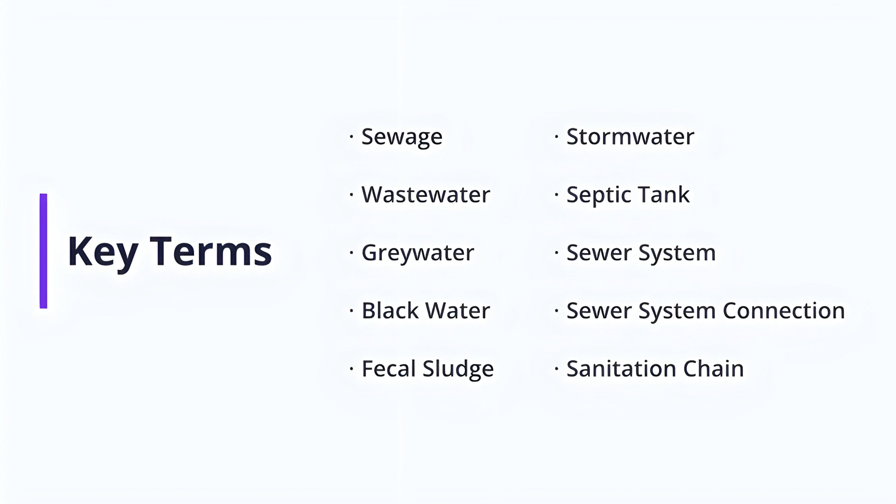This chapter provides an overview of the process and the multidimensional framework that will apply for the remainder of the course. Please note that some of the dimensions and considerations may not be applicable to your context. We will do a high-level overview of key terms relevant for our course. Let's get started. The term sewage is used interchangeably with domestic sewage, domestic wastewater, municipal wastewater, etc.

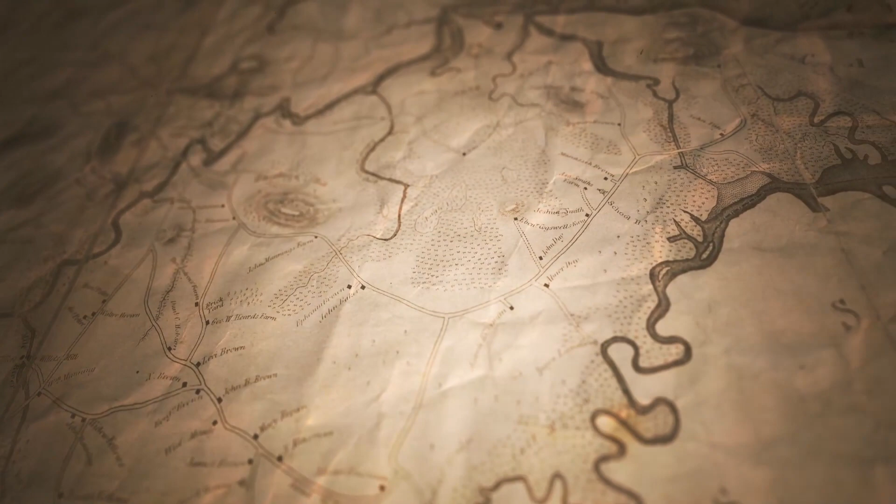Before the 20th century, sewage was usually discharged into a body of water such as a stream, river, lake, bay, or ocean. There was no treatment, so the breakdown of the human waste was left to the ecosystem. Now, the word sewage tends to refer to liquids or waste matter usually carried off by sewers. Today, the word sewage is slowly being replaced by the word wastewater. This means any water that has been affected by human use or touched by a human.

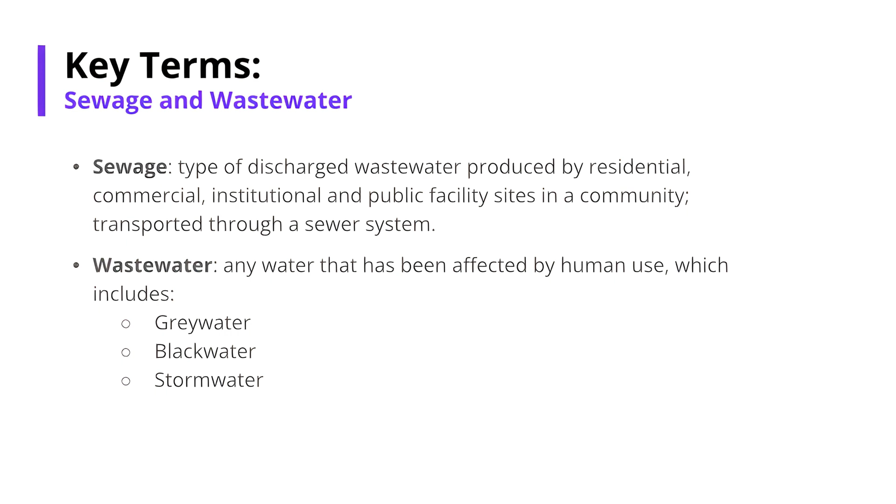The words sewage and wastewater are similar in the way that in the end we produce waste that is to be carried out by any means of transportation. The transportation includes sinks, tubs, showers, dishwashers, washing machines, toilets, and pipes, etc. Wastewater is used water. It includes substances such as human waste, food scraps, oils, soaps, and other chemicals. In homes, this includes water from sinks, showers, bathtubs, toilets, washing machines, and dishwashers.

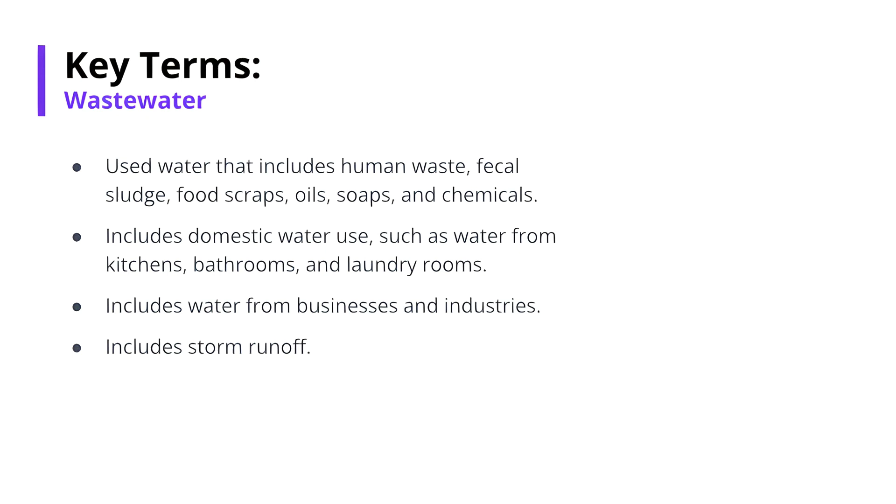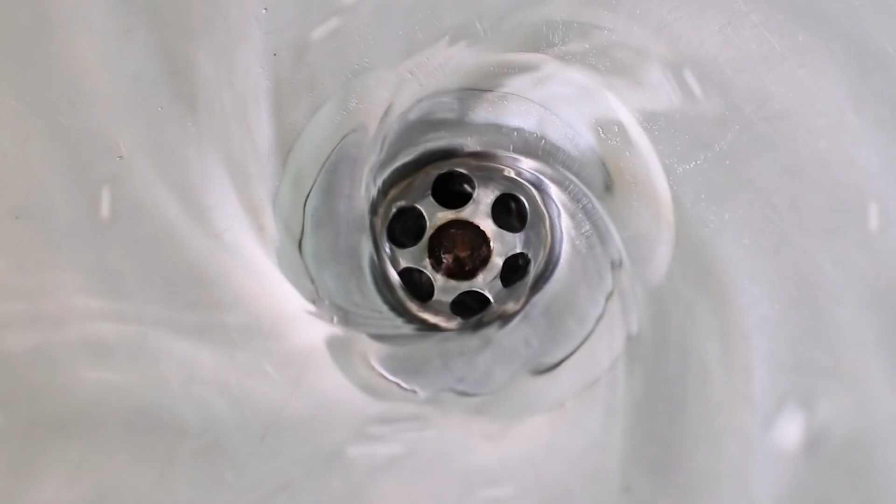Businesses and industries also contribute their share of used water that must be cleaned. Although some people assume that the rain that runs down the street during a storm is fairly clean, it is not. Harmful substances that wash off roads, parking lots, rooftops can harm our rivers and lakes. There are also remarkably nutrient-rich opportunities that exist in wastewater, which are not often captured. To give you a sense of scale, the U.S. Environmental Protection Agency estimates that an American generates anywhere from 50 to 70 gallons of wastewater per day. We Americans generate far more wastewater than any other parts of the world.

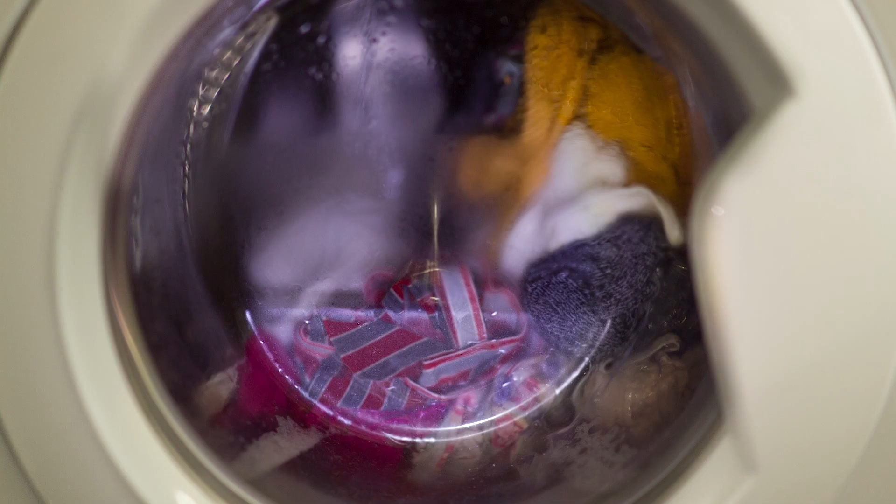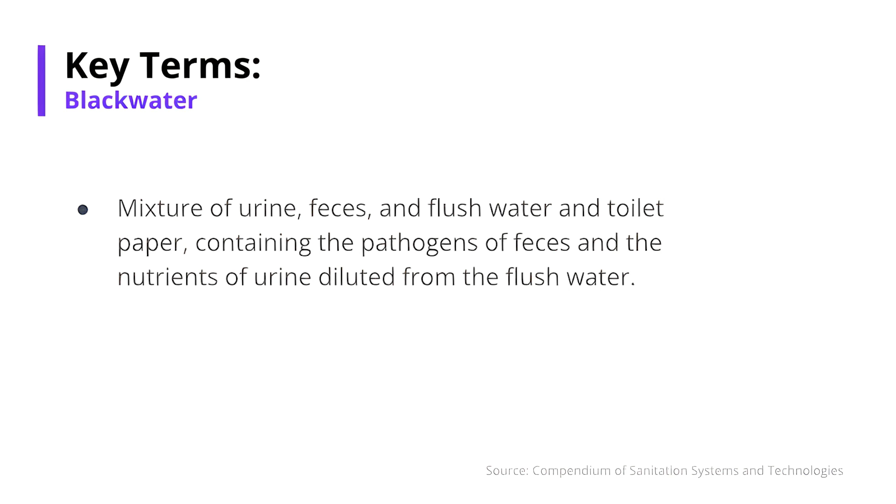As the name implies, gray water is on the continuum between clear and clean water and black water with respect to treatment. This includes the leftover, untreated water generated from washing machines, bathtubs, and bathrooms and sinks. Gray water accounts for approximately 65% of wastewater produced in households with flush toilets. In a sanitation context, black water denotes wastewater from toilets which contain pathogens. Black water can contain feces, urine, water, and toilet paper from flush toilets.

Another important term for our course is fecal sludge. This is the mixture of solids and liquids containing mostly excreta and water in combination with toilet paper, sand, grit, metals, trash, and other various chemical compounds. A distinction can be made between fecal sludge and wastewater sludge. Fecal sludge comes from decentralized systems like on-site sanitation technologies such as septic tanks. This fecal sludge has not been transported through a sewer.

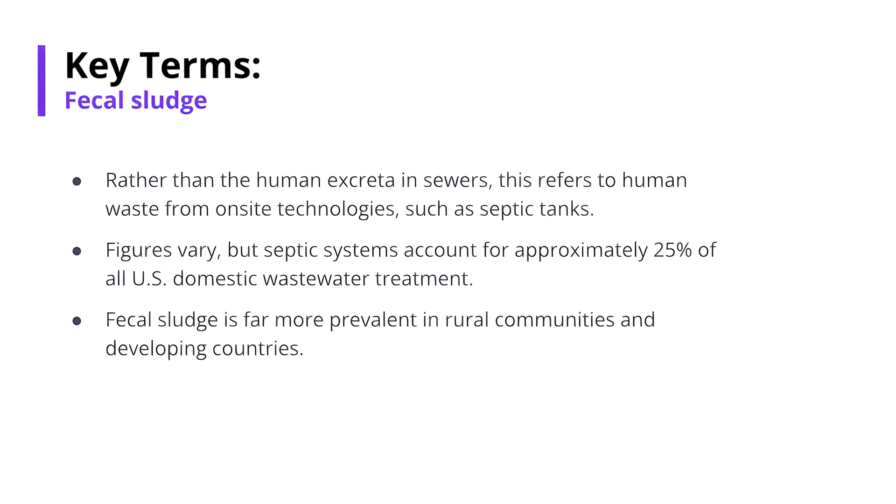It can be raw or partially treated, digested, or a slurry or a semi-solid. This results from the collection and storage and treatment of excreta or black water with or without gray water, depending on the household system. Fecal sludge that is not managed safely and properly can have dire impacts on families, communities, and on society more widely.

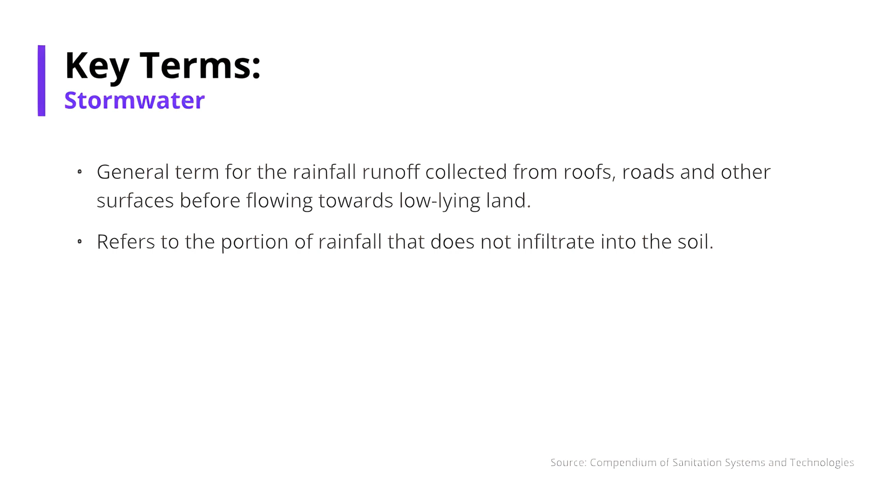Although it's not the focus of our course, it's worth mentioning stormwater since it can be combined with wastewater. Stormwater is excessive rainfall that does not soak into the ground, but instead flows over the land's hard surface into the nearest water body through storm drain channels. Stormwater can be a problem because it carries considerable pollution along with it wherever it flows.

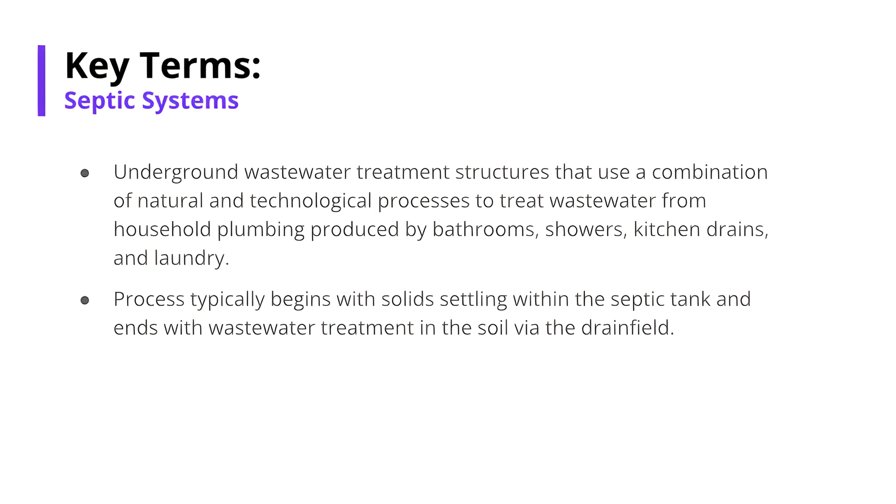EPA found that more than 1 in 5 households in the U.S. depend on individual septic systems or decentralized systems to treat their wastewater. These systems are used to treat and distribute relatively small volumes of wastewater, usually from houses and businesses located in suburban and rural locations not served by a public, centralized sewer system.

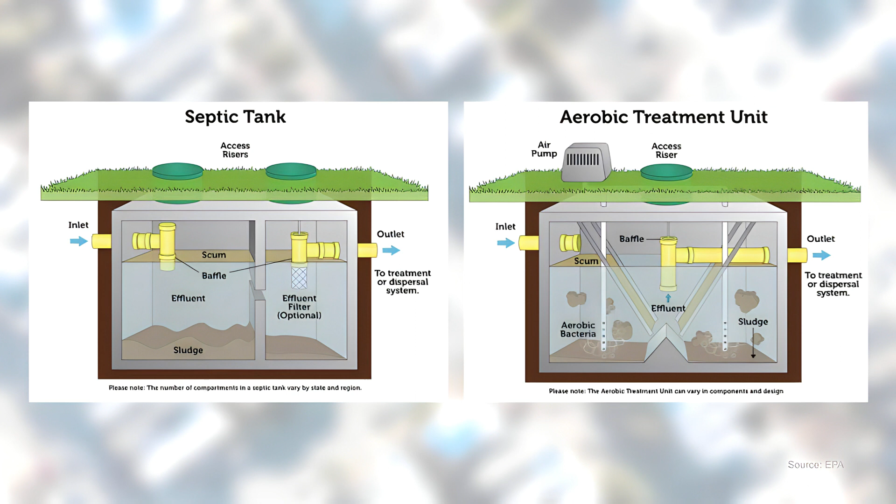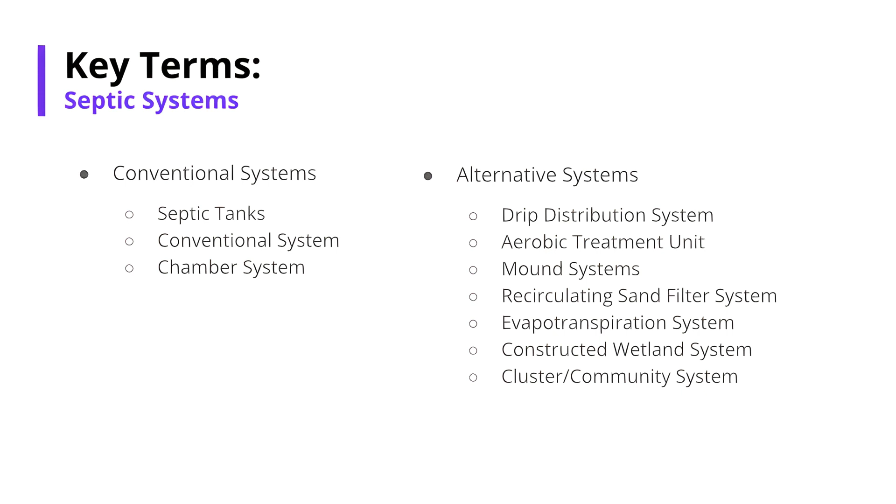The design and size of a septic system can vary widely. From within your neighborhood to across the country, there can be considerable variation due to a combination of factors. These factors include household size, soil type, site slope, lot size, proximity to sensitive water bodies, weather conditions, or even local regulations. There are 3 types of sewer systems: sanitary sewer, stormwater sewer, and the third one is a combined sewer system.

For this course, we'll focus on sanitary sewers. In American colloquial English, sewer system is applied more frequently to the large infrastructure of sewers. The main purpose of a sanitary sewer is to carry waste from homes and businesses to wastewater treatment plants.

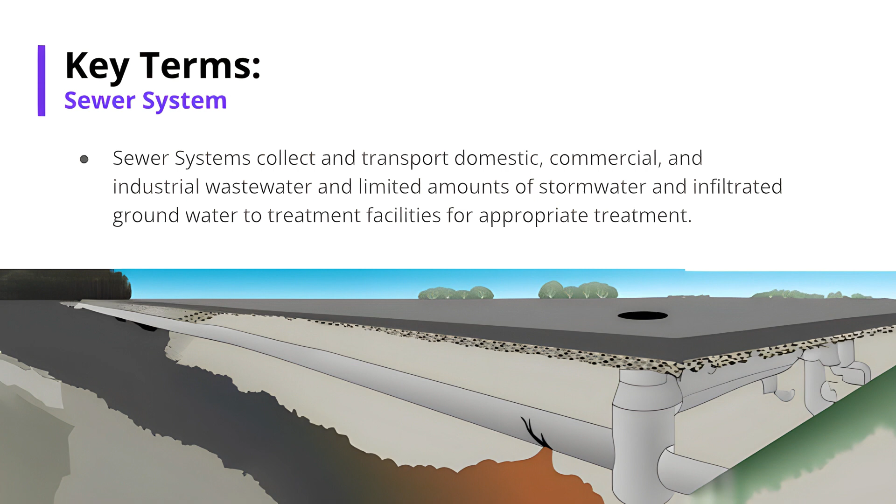According to High Tide Technologies, these systems are designed to handle human waste and easily degradable manufactured solids such as toilet paper and tissues. These underground systems consist of many miles of tunnels, piping, manholes, and pumping stations to transport the waste from houses and commercial buildings, but not stormwater, through the system.

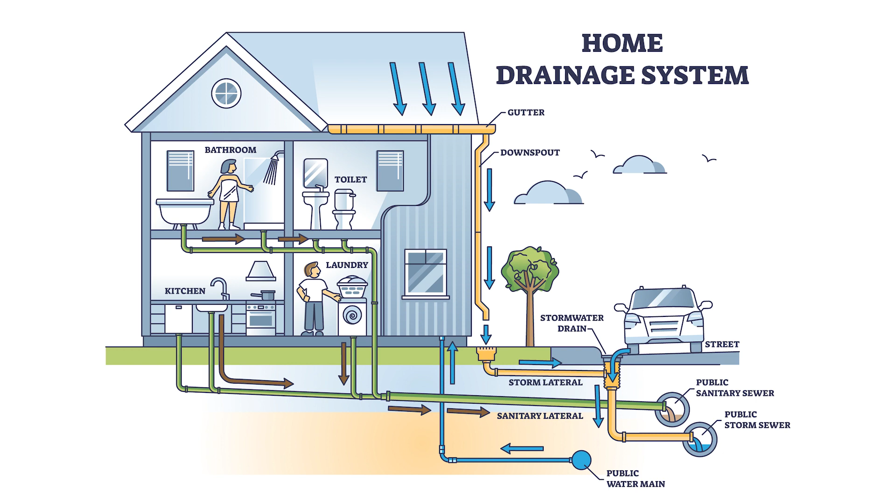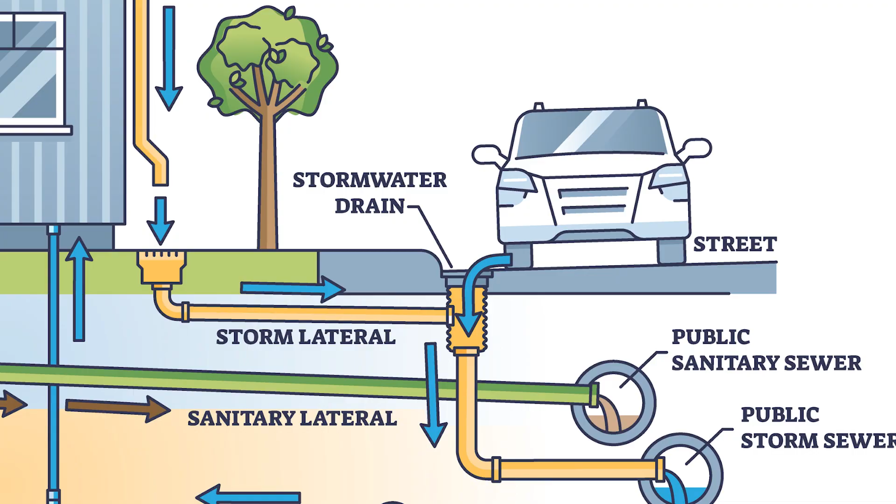How these sanitary sewage systems work is by carrying human waste through small plumbing pipes in the home to gradually bigger pipes outside until it reaches the main sewer line in the street. From here, the sewage is transported to a wastewater treatment plant to be treated and returned safely to the environment.

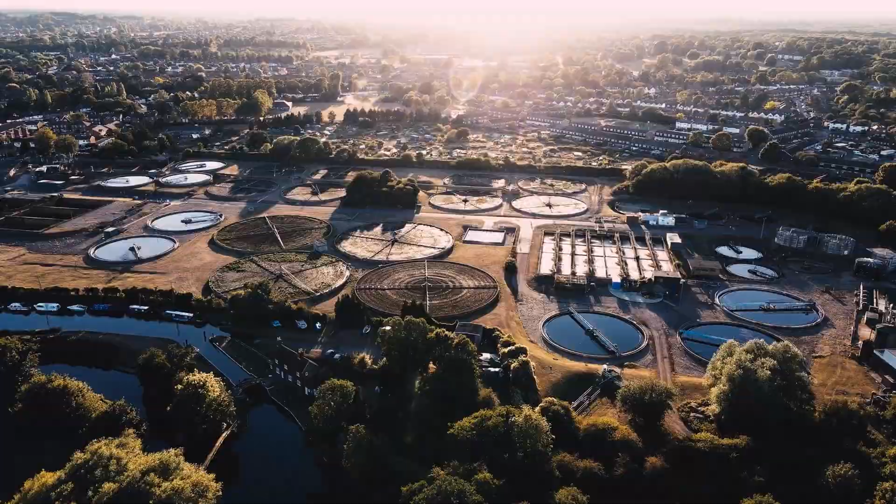There are many types of sanitary sewer systems as well. This includes conventional gravity sewers, force mains, effluent sewer, pressure sewer, and simplified sewers. The goal of this course is to understand the process of encouraging households with septic systems to connect to a sanitary sewer system. While this course focuses on the process, technical expertise and an extensive understanding of local conditions will be critical in determining the best type of sewer or combined sewer system needed by the community.

This course is about household connections. To define a sewer system connection, we will use a modified World Bank definition of a sewer system connection from 2017 with common legal definitions from Law Insider based in the United States.

A sewer connection means the point where an individual sanitary service line attaches to the city's or the community's sewer system. This enables the discharge of an individual sewage waste stream to the sewer collection main. It includes the collection and conveyance of black and/or gray water from a household or property, and the exclusion of rainwater or surface water in the connection to the sanitary sewer system network.

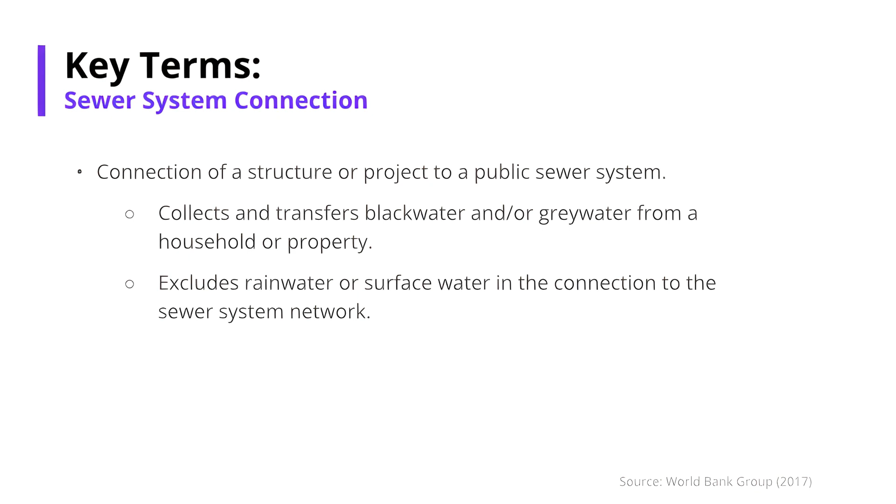As we're learning during this chapter, sanitation is much more than simply sewers and toilets. Planners and engineers play an important role during all segments of the sanitation chain. The sanitation chain shows the importance of actions and stakeholders, each with its own particular challenges.

The first stage in the sanitation service chain is the interface and containment. This is where black water or excreta is captured and stored. For some households, this will include gray water. Homes capture this excreta at the point of defecation to ensure it does not go untreated into the environment.

The next segment of the chain is to empty and transport the fecal sludge or black water. For decentralized septic systems, this may be dominated entirely by private sector operators. The frequency of emptying and conveyance is tied to the availability and cost of service providers. Finally, communities have local laws to enforce treatment and disposal.

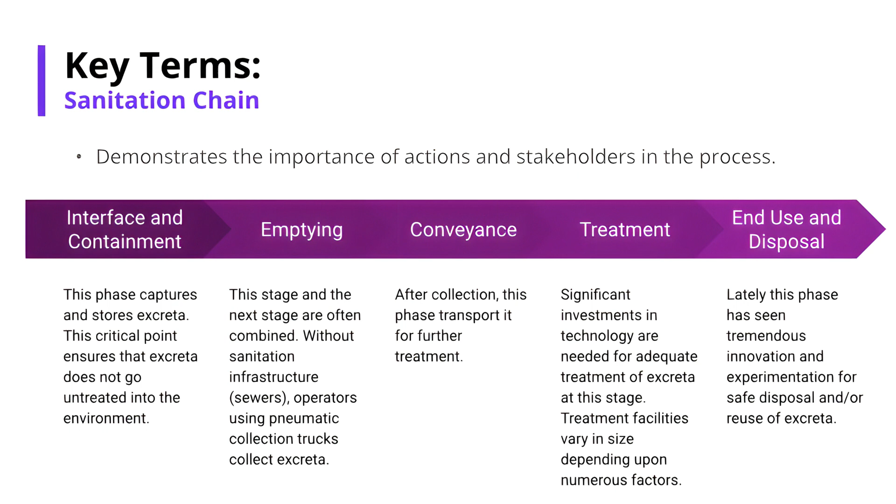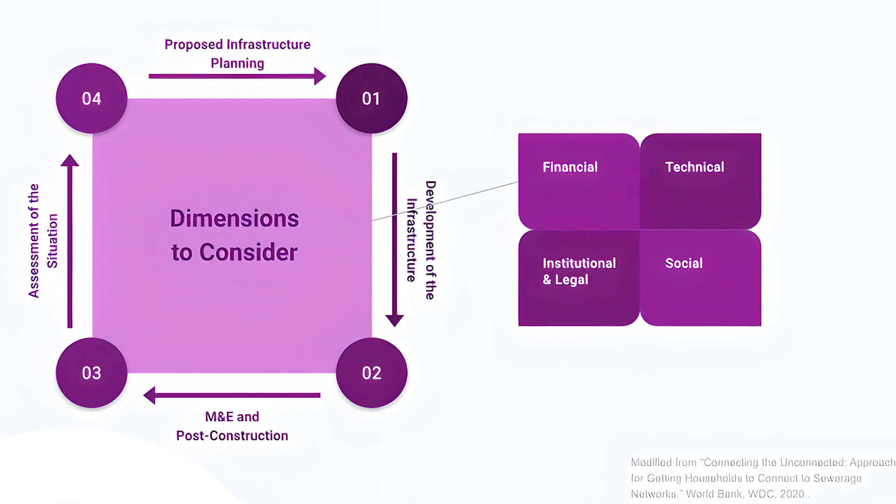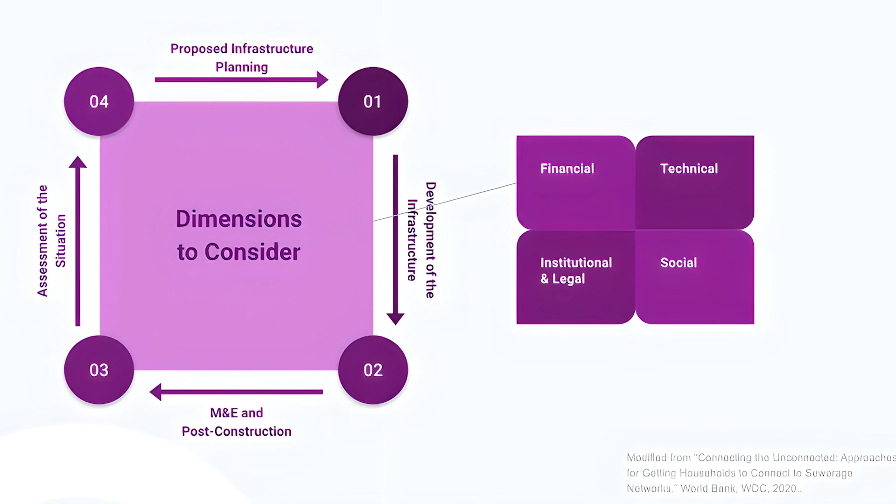Now to move to the crux of our course. Here is a visual depiction of the framework we will use to walk through the process of connecting households. Again, these steps and dimensions will vary by local context, laws, and existing practices and infrastructure. While the dimensions and points for consideration are not exhaustive, we will discuss many of them during this course. They will provide you with a high-level and systematic approach for making informed decisions.

There are 4 key phases or stages we'll cover during this course. First, the assessment phase of the proposed program and infrastructure. Second, the planning and design phase of the new sewer system. Third, the implementation phase. And finally, the 4th phase, the monitoring and evaluation for the post-construction phase. These steps provide a high-level process for communities seeking to increase household connections.

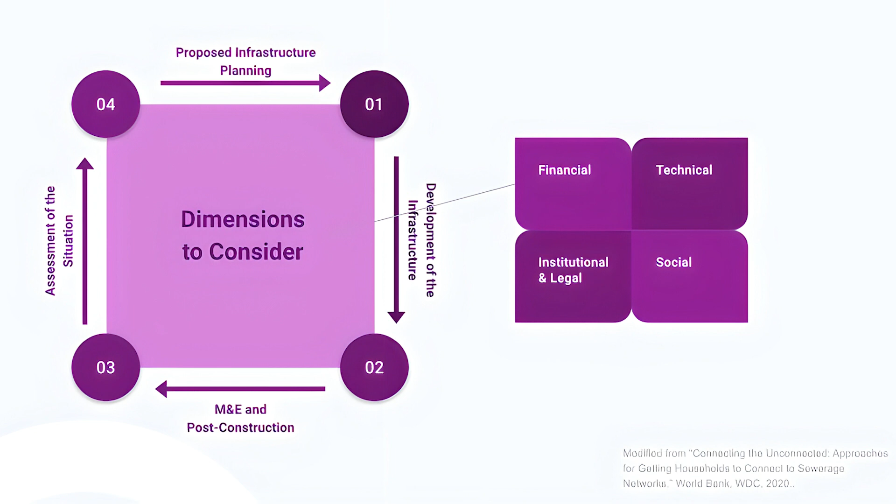The designated entity overseeing the connection program needs to look at the process from the financial view, the institutional and legal angles, the technical position, and finally, the social lens of the intervention. Some communities may want to adapt the institutional and legal angles to include policies and regulatory perspectives.

In the next chapter, we'll take a closer look at the first phase, the assessment phase, where communities look at their existing infrastructure and programs to determine the best path forward for the proposed infrastructure.